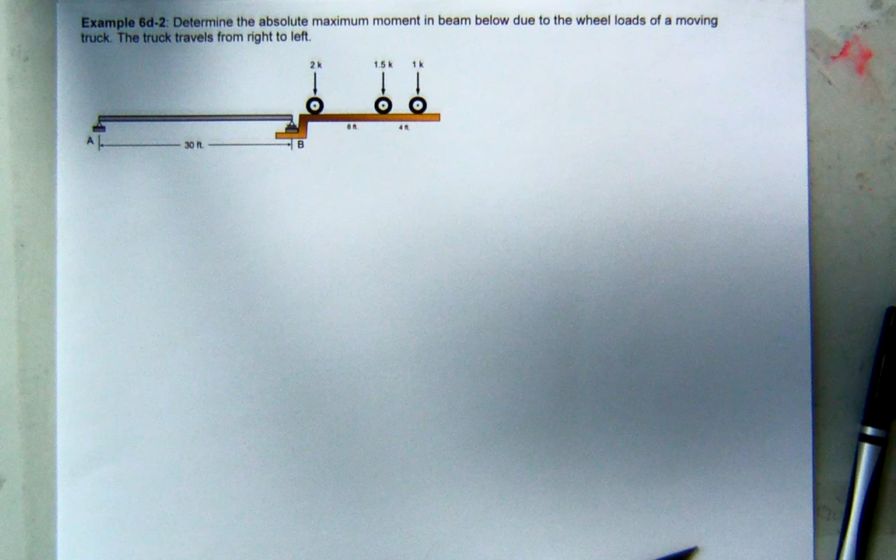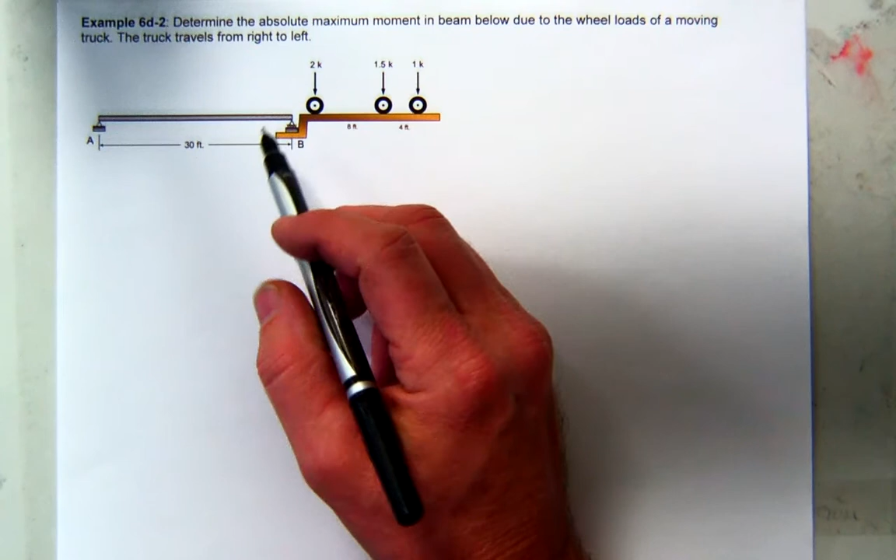All right, let's work on this guy. So we want to determine the absolute maximum moment in the beam. You might remember we talked about that last time, and that's that technique where about the center line you balance each force with the resultant force.

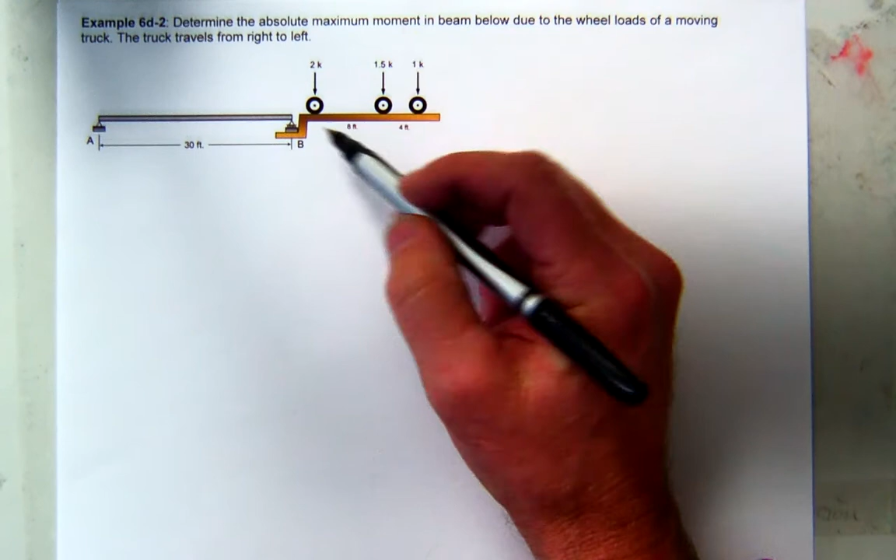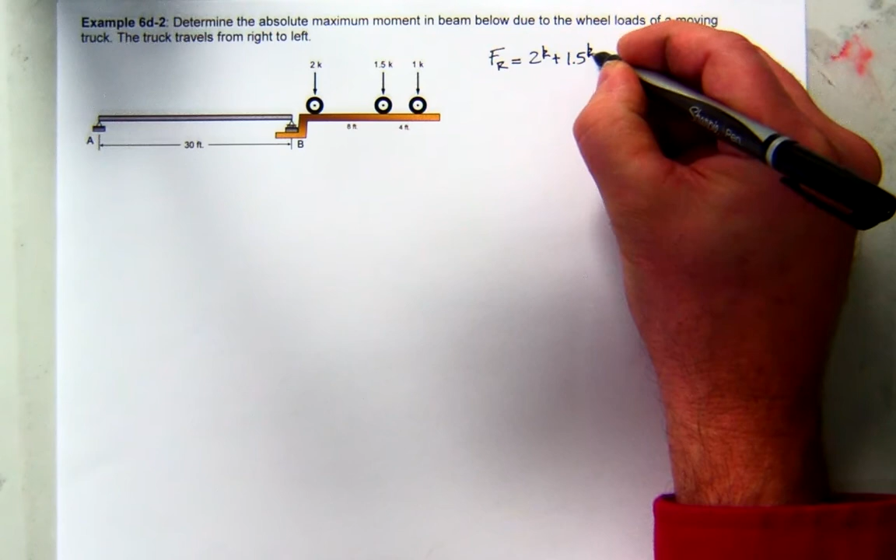And since we had three forces in our system, we need to do three cases. So the first thing we need to do is find the resultant force and its location. The resultant force is an easy calculation, you just add up the three: 2 kips plus 1.5 kips plus 1 kip. That looks like 4.5 kips.

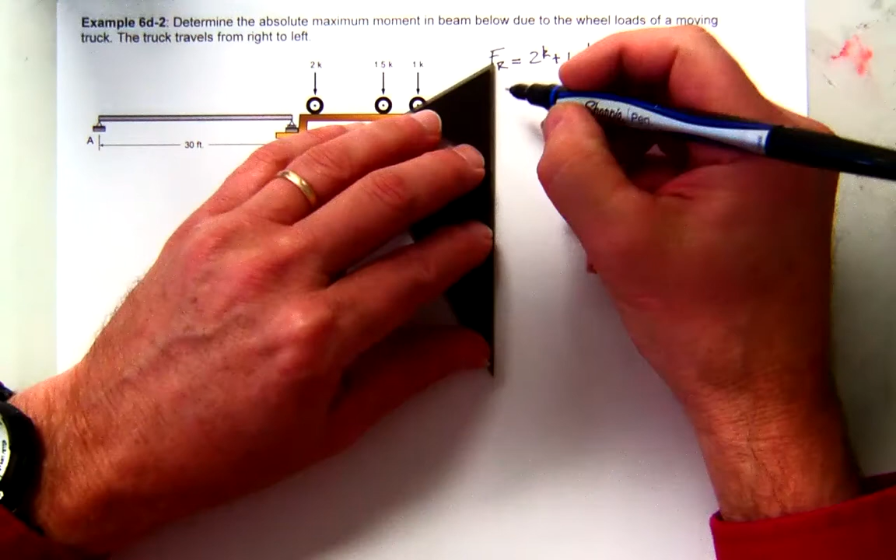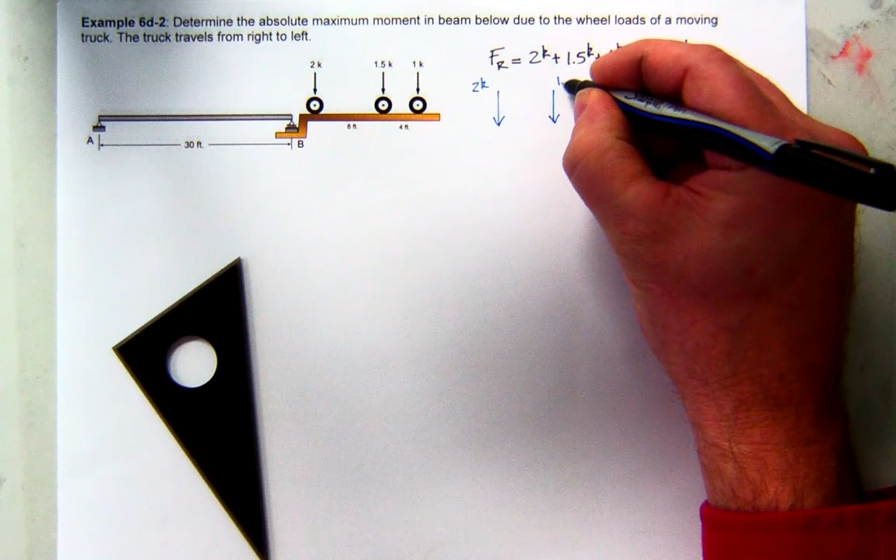Now for the resultant, what I like to do is draw a little picture. I'll just start with the one on the far left. So there's 2 kips, and then some distance back, 1.5 kips, and then 1 kip. And that is 8 feet and 4 feet. So I'm going to sum the moments of this about this back point here, P.

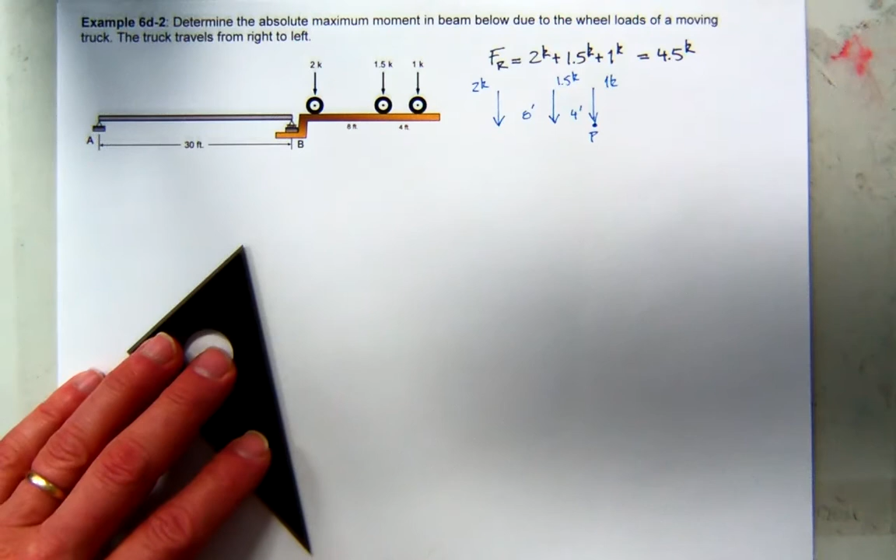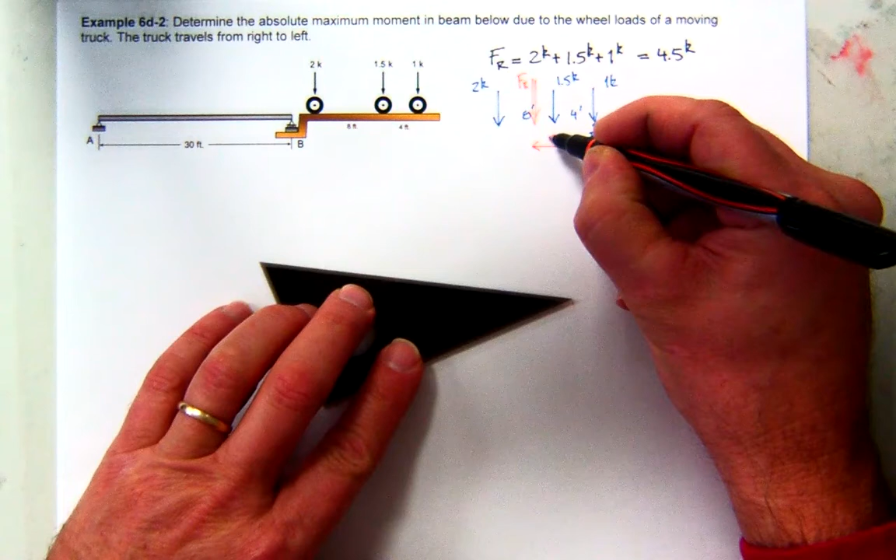And somewhere in there is my resultant force, so I would measure that from P this way. I'll call that X1. Remember, the force, we already know that the forces are the same because we know the resultant is the equivalent of the three.

So now we want to have the same moment capacity. If I sum moments about that back point P, what do I get? Well, the 1 kip will create no moment. I'll get the 1.5 kip force times 4 feet and the 2 kip force times 12 feet. And that equals 6 and 24, 30 kip feet.

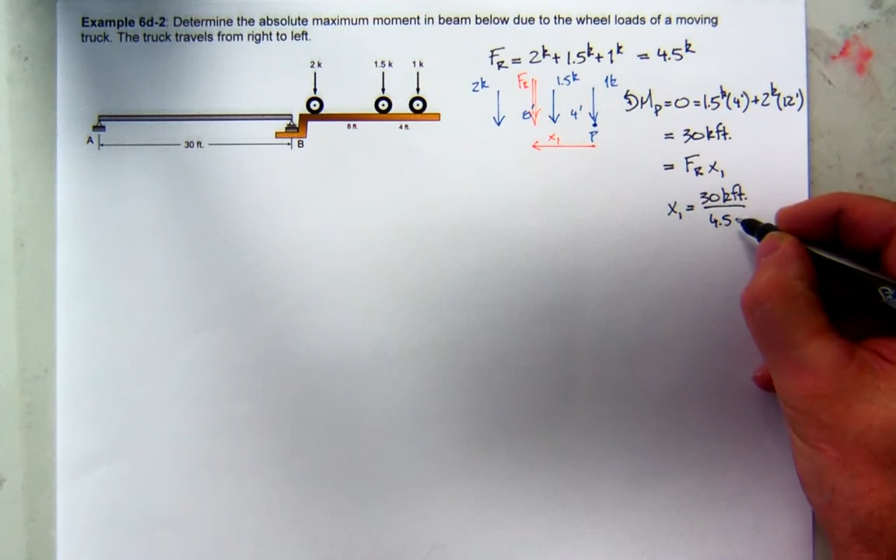And then if I do it again, this time just using the resultant force, I will get the resultant force, which I know is 4.5, times X1. So these two things have to be equal, so we can solve for X1. It should be 30 kip feet divided by 4.5 kips. I don't know what that is off the top of my head.

A little more than 6? 6.67. 6.7, is that right? Yeah. So we got that condition, so now we're going to have 3 cases to deal with.

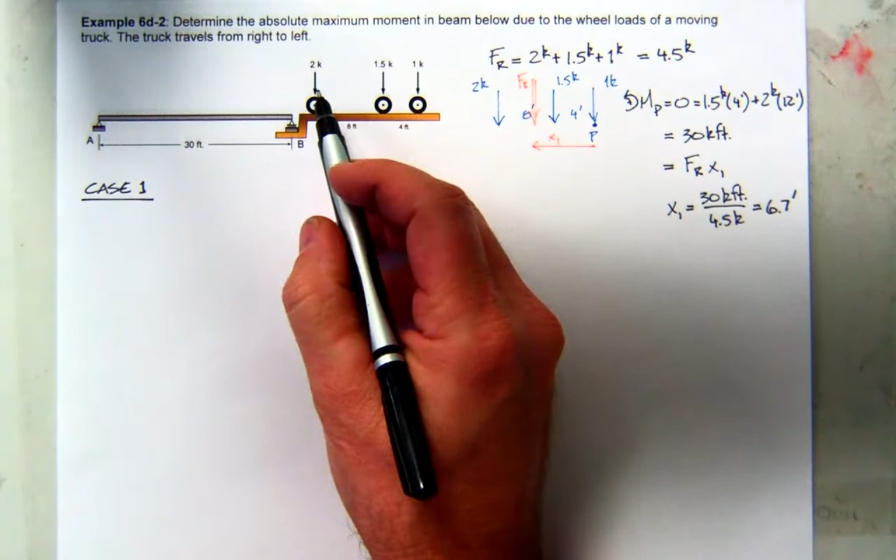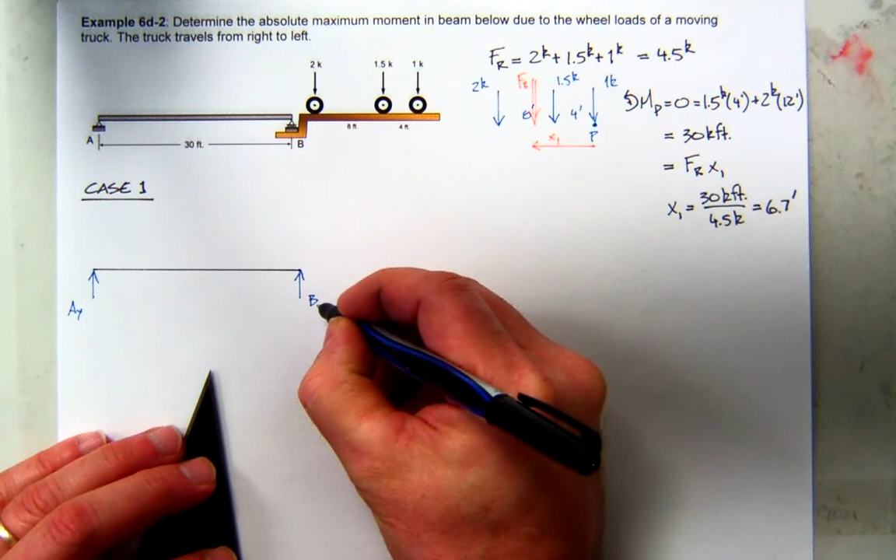So I'll just call this first one case 1. That's where we'll take the front load and balance it with the resultant force about the center line. So let me redraw the beam for reference, and let's look at AY and BY. And then I'll put in the center line, and then we need to look at a balance between these.

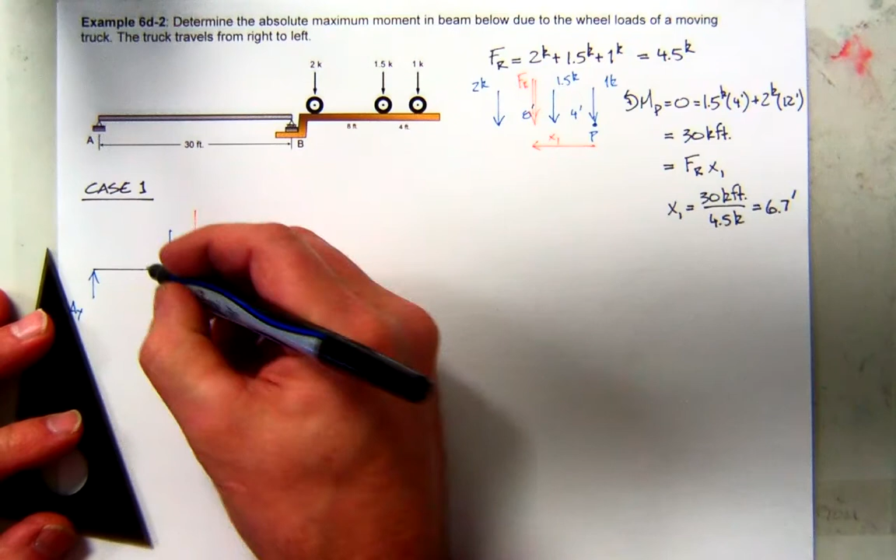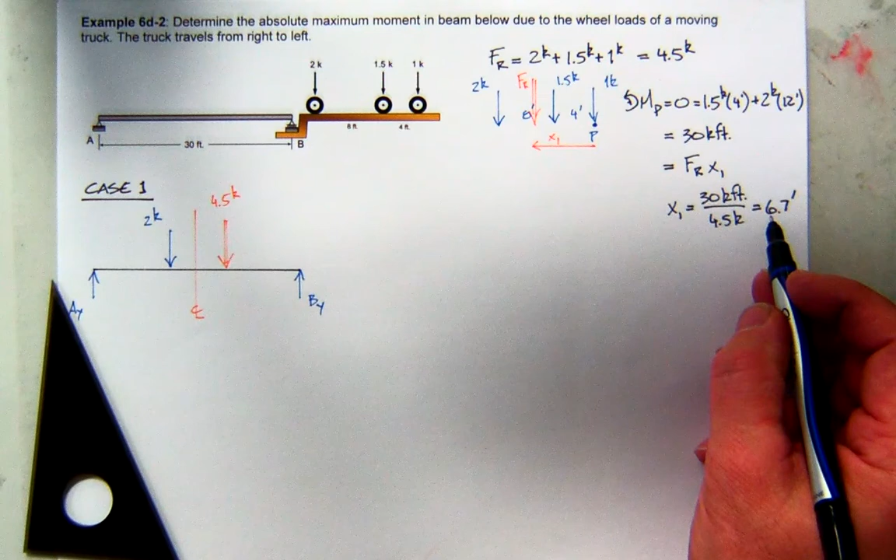So this is 6.7 feet. The total here is 12. So the distance from 2 to this thing would be 12 minus that, or 5.3. And that's the distance between these two, and that's the distance we're going to have to split. So here's my 2 kip force balanced with the resultant force, which is 4.5 kips. And the distance between those will be the 5.3 divided by 2, which is going to be what?

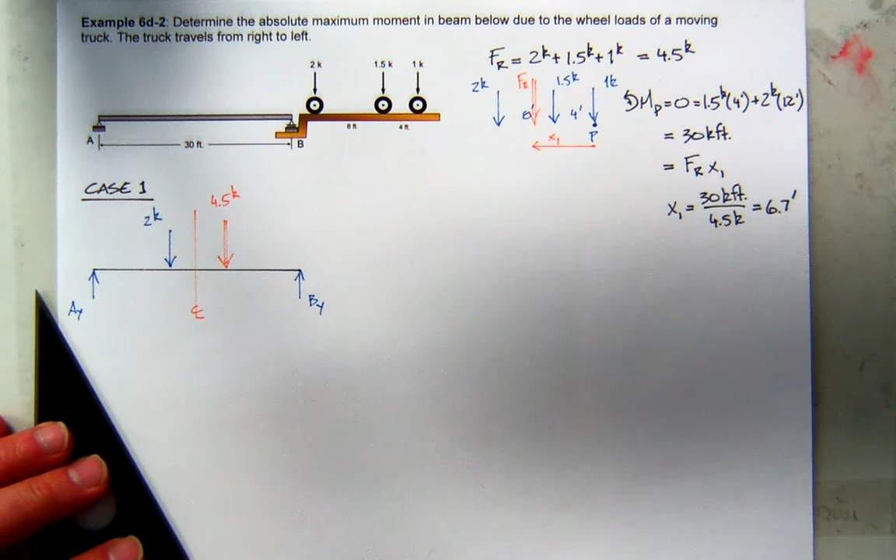Something really strange, 2.67? That's close enough, probably with the rounding it's probably 2.67. It's actually 5.33333, isn't it? What's 5.333 divided by 2? That's the 2.67. I believe you. That's 2 2/3, right? Yeah, I'm going to write it that way, 2 2/3 feet.

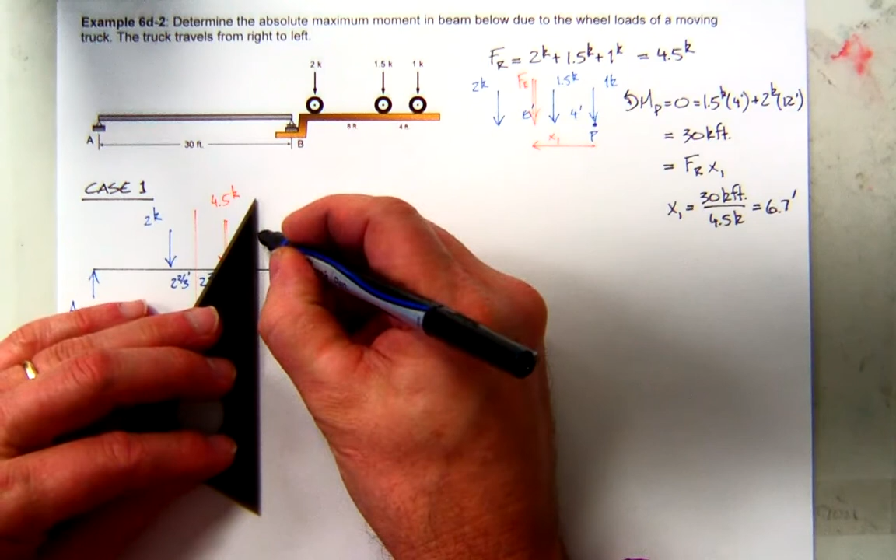And then we go back to the 1.5, and we go back to the 1. Now I know the difference between there is 4. And what's the difference here? Well, that was 8, that's 6.67 minus 4, that's 2.67, right? Another 2 2/3. I think so, so that's another 2 2/3. Strange dimensions there unfortunately, but that's the way it goes.

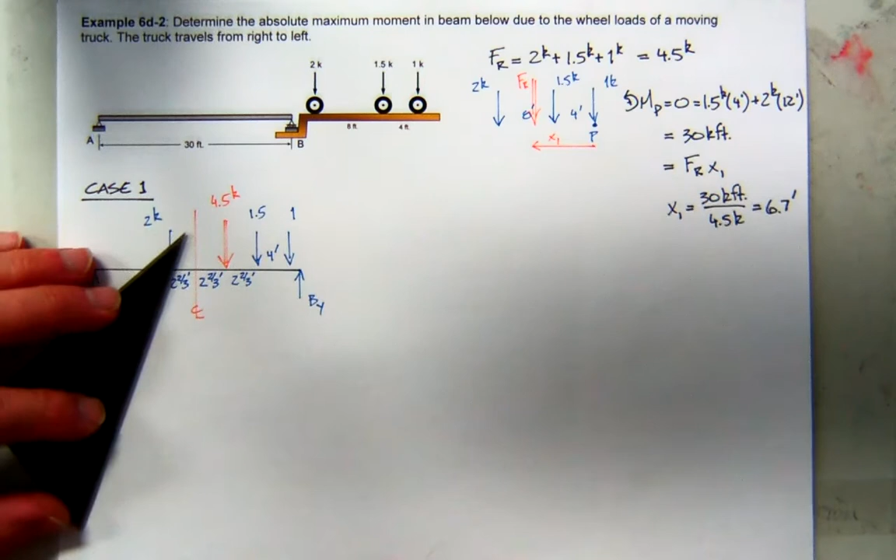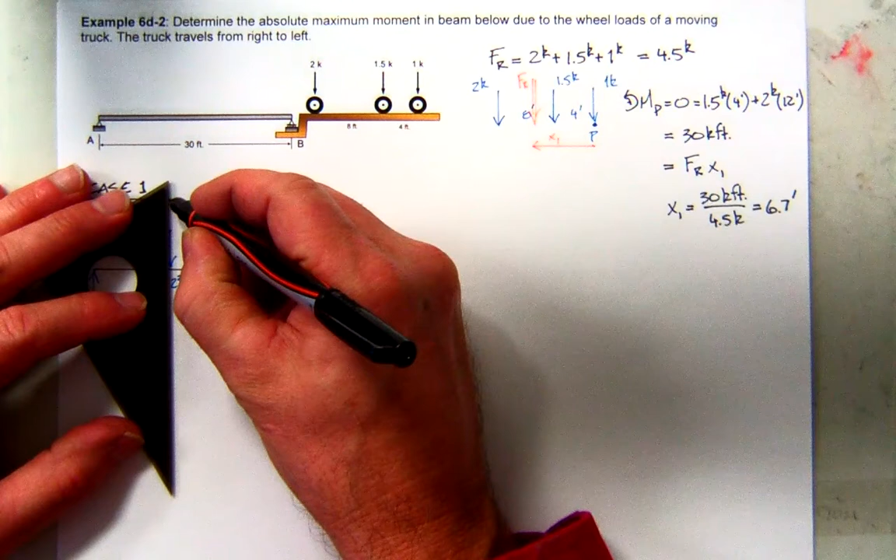Now remember, case 1, we're balancing 1, so we're really looking for the moment under here, I'll call it M1. So that means ultimately I'm going to cut the structure there, and you decide whether you want the left side or the right side. I think the left side is clearly the advantage. So we want to find the reaction at A, so let's come over and sum moments at B and make sure our structure is in equilibrium.

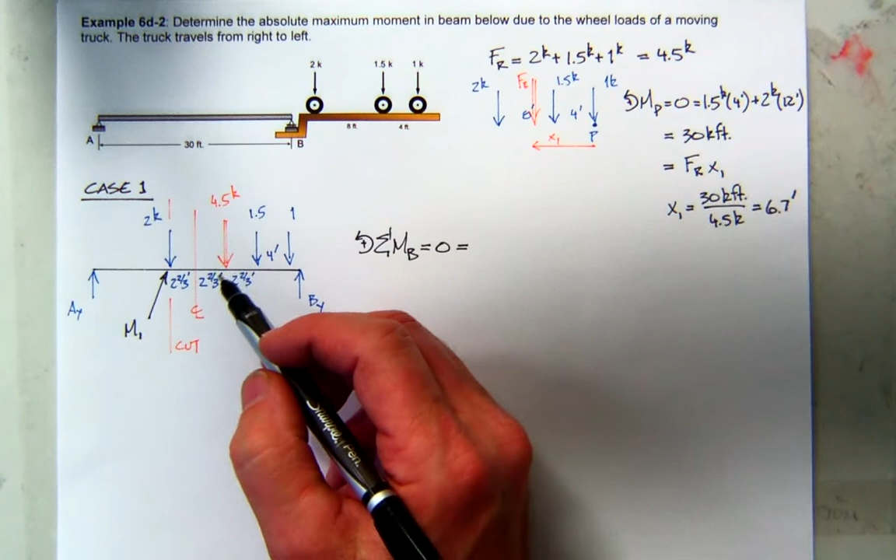Now again, you can work with all the forces or just the resultant. I think in this case the resultant's going to be a lot easier to work with than dealing with 3 forces. So the moment about B, the resultant force creates positive moment. It's 4.5 kip force. What's the distance from B to the centroid? Well, this is 15 feet, and it'll be 15 minus the 2 2/3, so that should be 12 1/3. That make sense? This is from B to here. And then AY is negative moment, and it is a moment of 30. So what's AY?

I think it'll... I don't know whatever that is. Something like 2 something? 1.85? Anybody else get that? Yes? No? Maybe? Anybody? Bueller? No? Okay, I'm going to believe it's 1.85. Wow, you guys are really in another world today. 1.85?

And that will be in kips. So now I can cut my structure, and we know the reaction is 1.85 kips. I'm looking for the moment there, which I'm calling moment 1, the positive moment. And what's that distance going to be? Well, this section is also 15 minus 2 2/3, so that'll also be 12 1/3 feet.

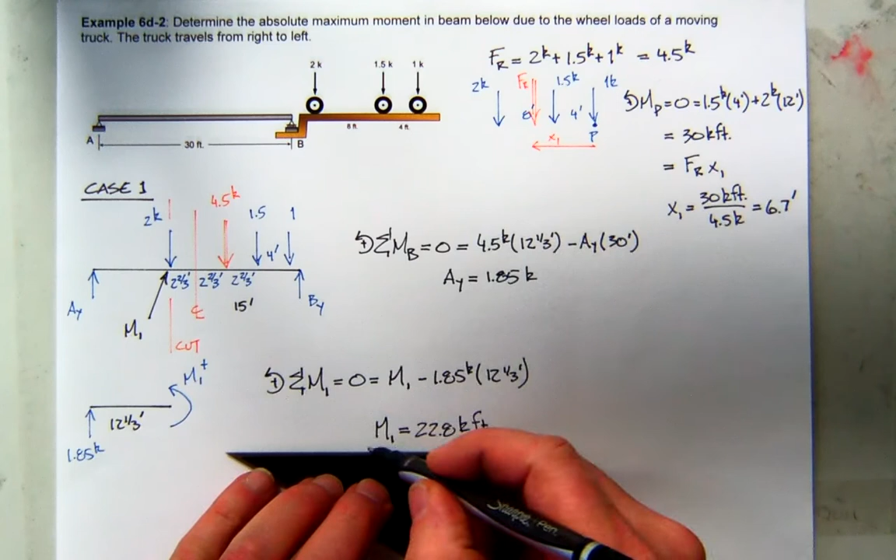Quick question. So when you make your cut and you're taking the moment, do you take it about the first force? You take it under the force that you're balancing the resultant with.

Okay, so the next case that we're going to do, we're going to balance the resultant and the second force. So you'll take it at that second force, which would be just to the right, and we'll take a moment into that. Then the third case will be these two.

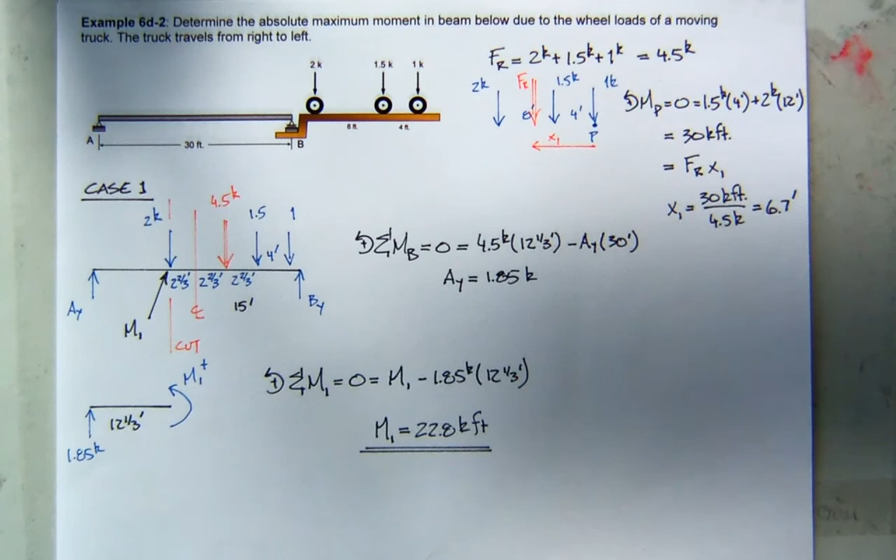All right, so I've got to make some room because I don't have enough on my page here to continue. Give me just a second. So we'll flip that one over, and we'll start again with case 2.

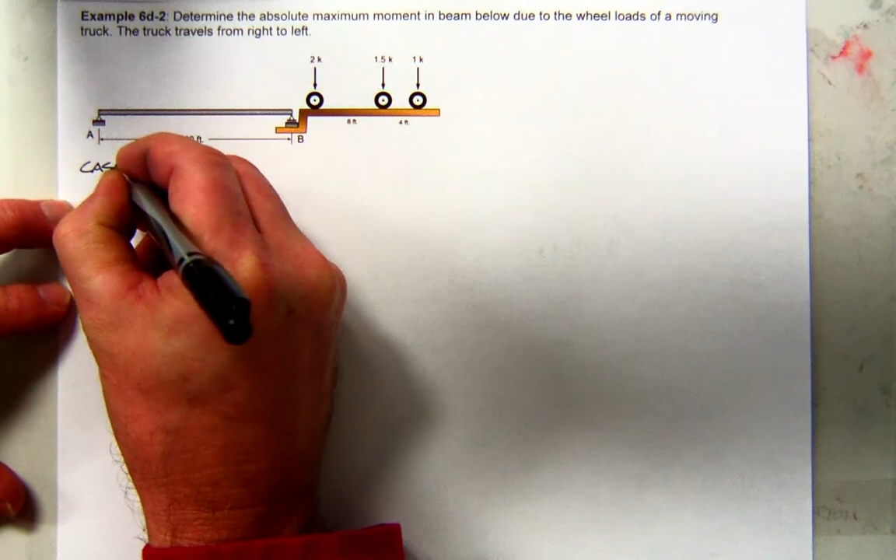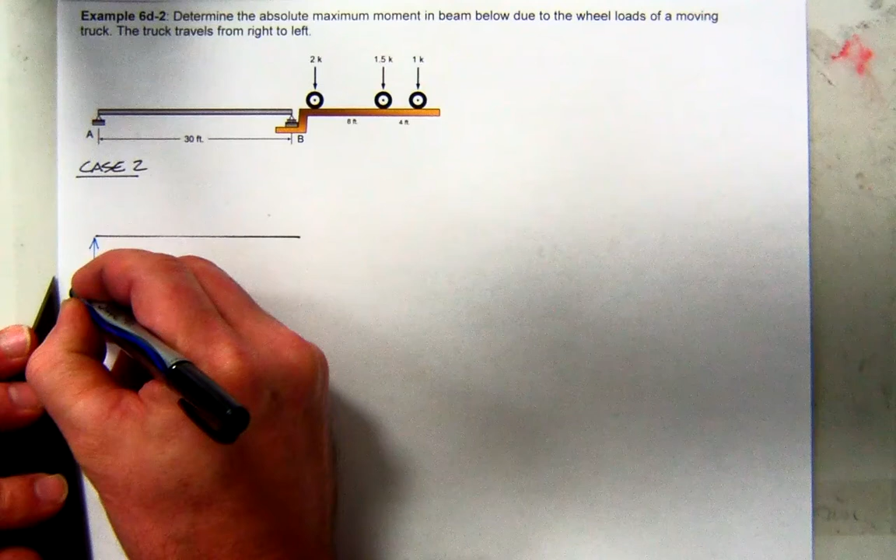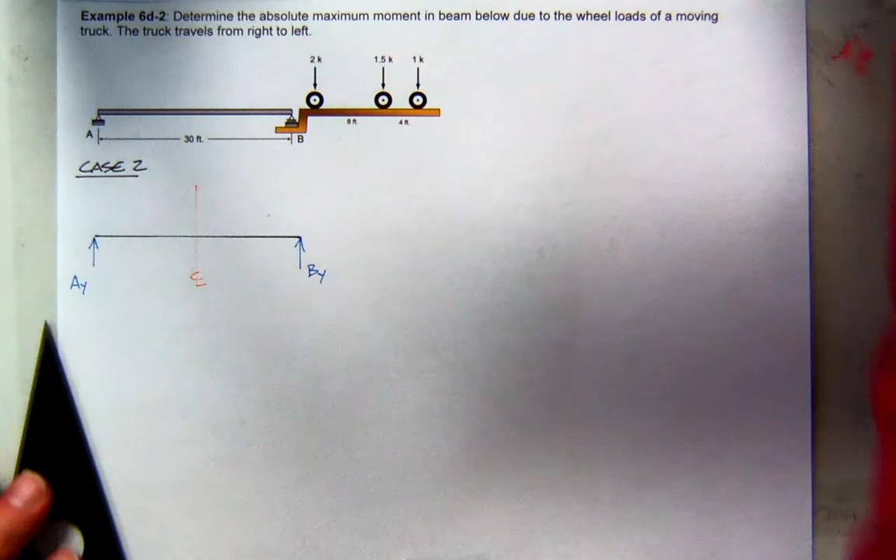So again, we'll start with the same beam. We'll have a reaction at A, a reaction at B, and then about the center line, we're going to balance our load system. Remember, we're looking at this as our system, so we want to balance the resultant force and the second force about the center line.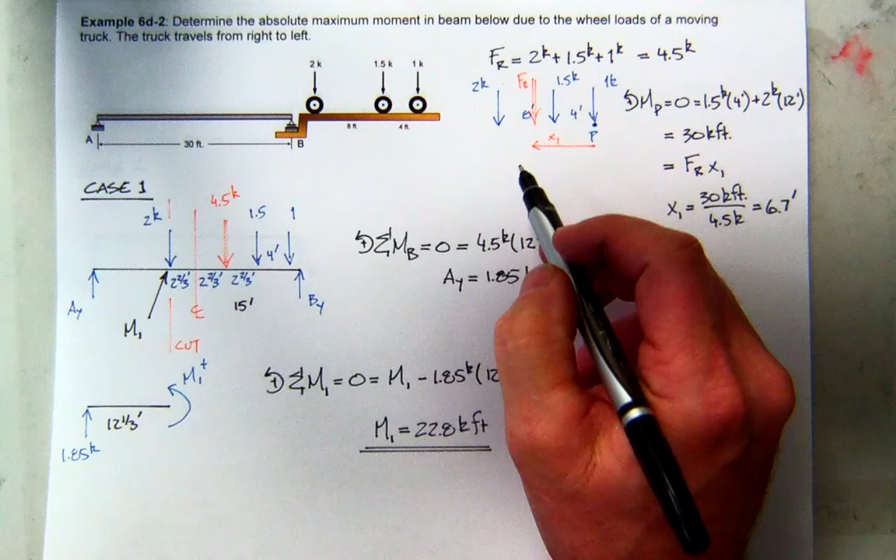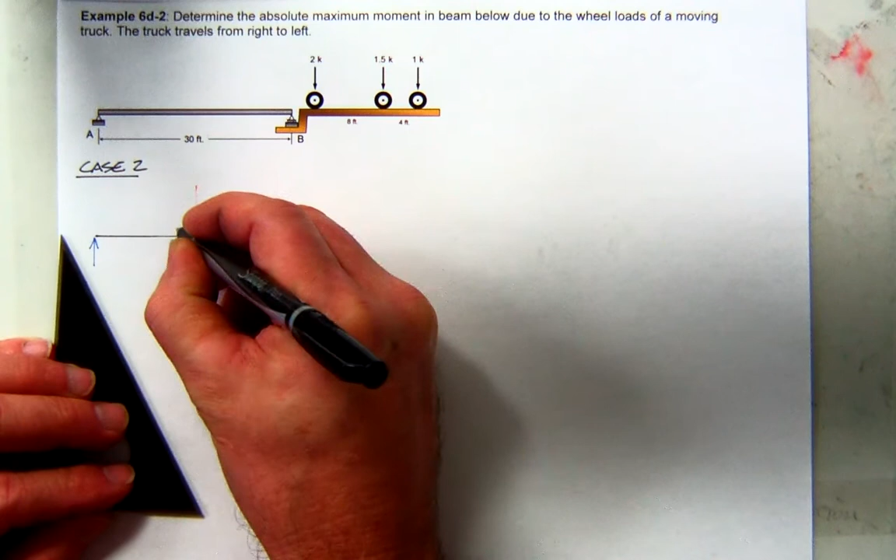And what's the distance here? That's 2 and 2/3. You divide that, you get 1 1/3, right? So from the center line, 1 1/3 to the left is the resultant force, 1 1/3 to the right is the second. I can't draw that to scale, so I'll just put 1 1/3, 1 1/3 feet, and on the left side...

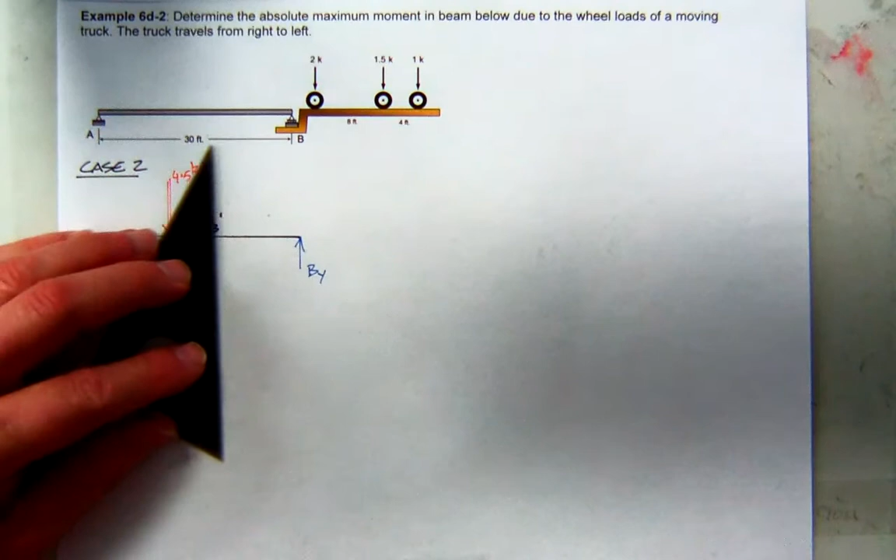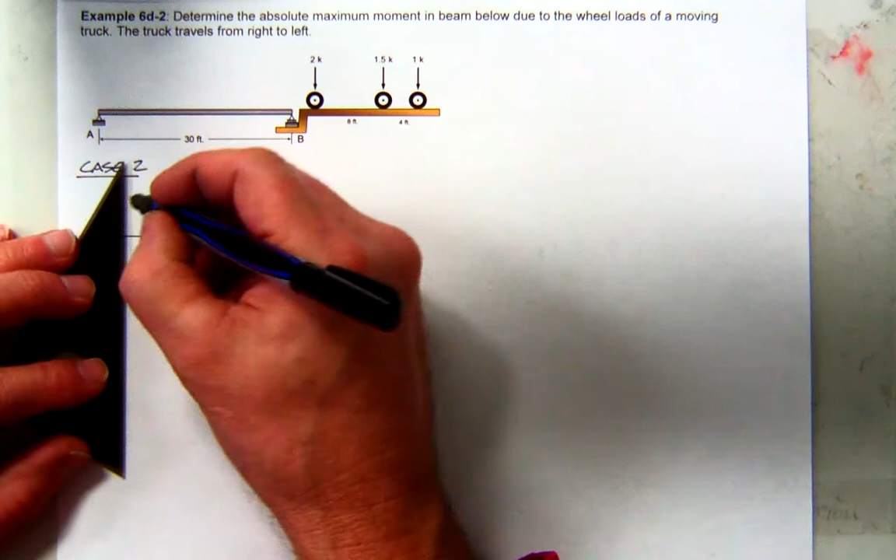That's my resultant force, 4.5 kips. On the right side is the second force, which is 1.5 kips. And then 4 feet back is the 1 kip force, and so many feet forward is the 2 kip force.

And that distance there, we also had solved this distance here, and I believe that was... what was that before? That was 5 1/3, wasn't it? Because this was 8 feet. This was 12 total, and we went 6 2/3, so this is 5 1/3. That make sense?

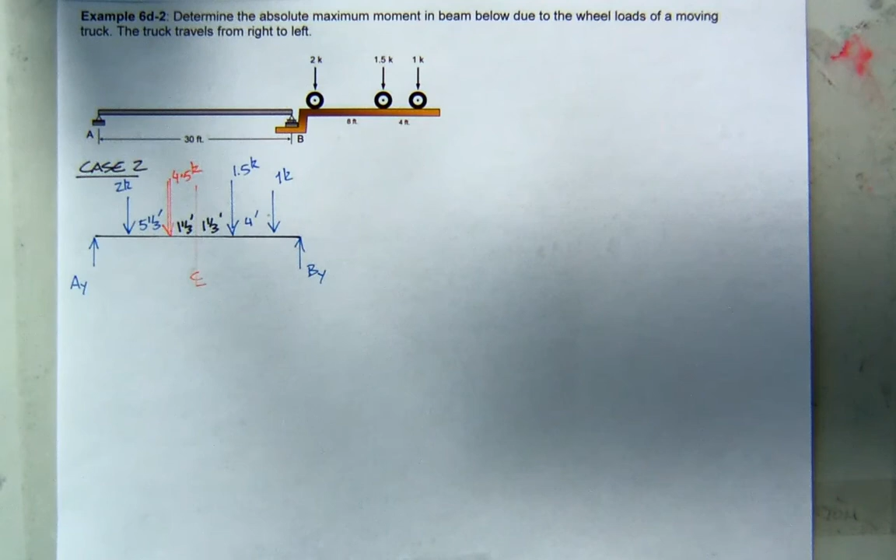And we're looking for the moment here. Call that M2. So that's probably where we'll cut the structure.

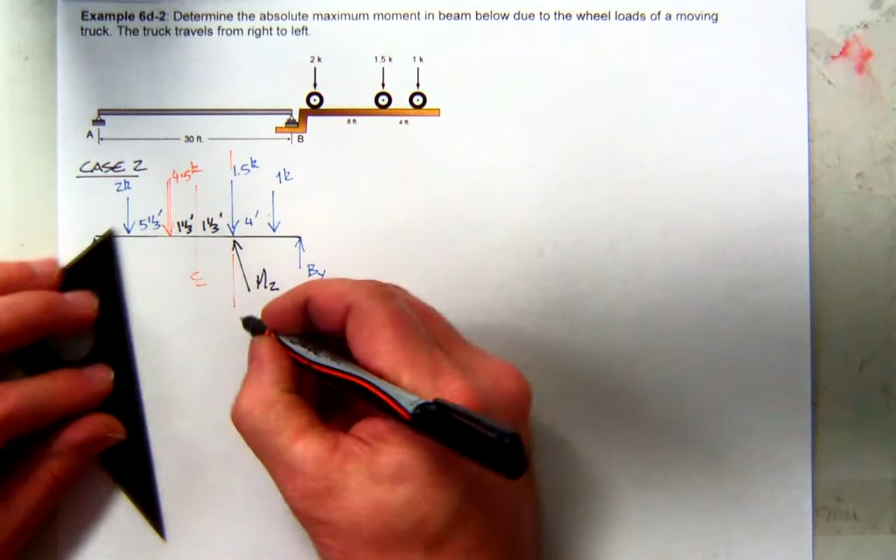You have to decide left or right. Yeah, right's going to be... This is the first time in the problems that we work here in class that because we have 3 forces, when you cut this middle force, no matter what side you look at, you're going to have to deal with a force in addition to just the reaction. So we will go right, so we'll need the reaction at B.

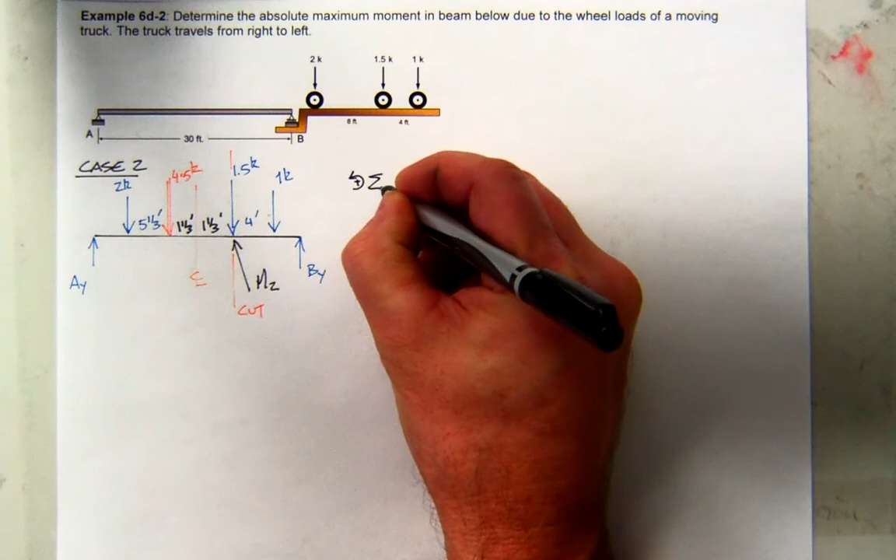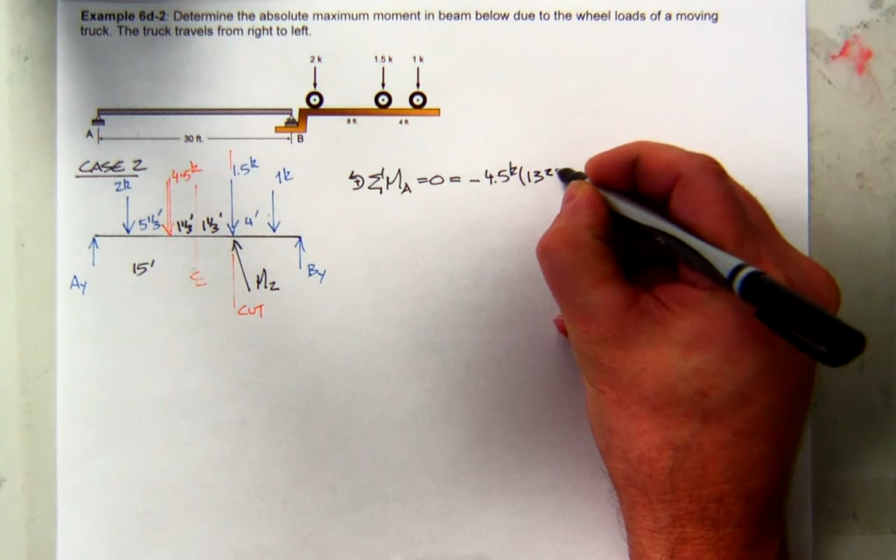So let's sum moments about A, and that will give us the reaction at B. Just like before, we're only going to use the resultant. So about A, our resultant force creates negative moment. The force is 4.5 kips. And what's the distance from A to here? Remember, the total distance is 15, so 15 minus 1 1/3 should be 13 2/3. And then over here at B, B creates positive moment, and the distance from A to B is 30. So what's BY? 2.05? 2.05, and then it'll be kips.

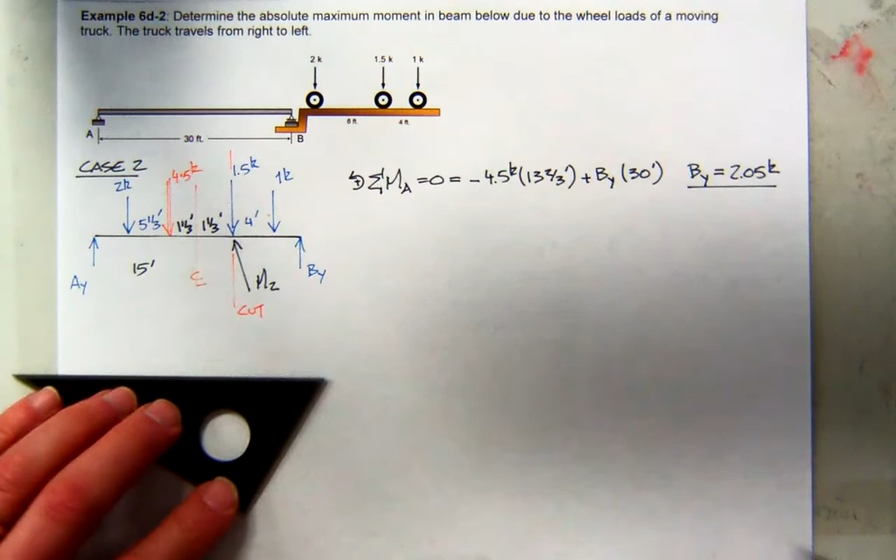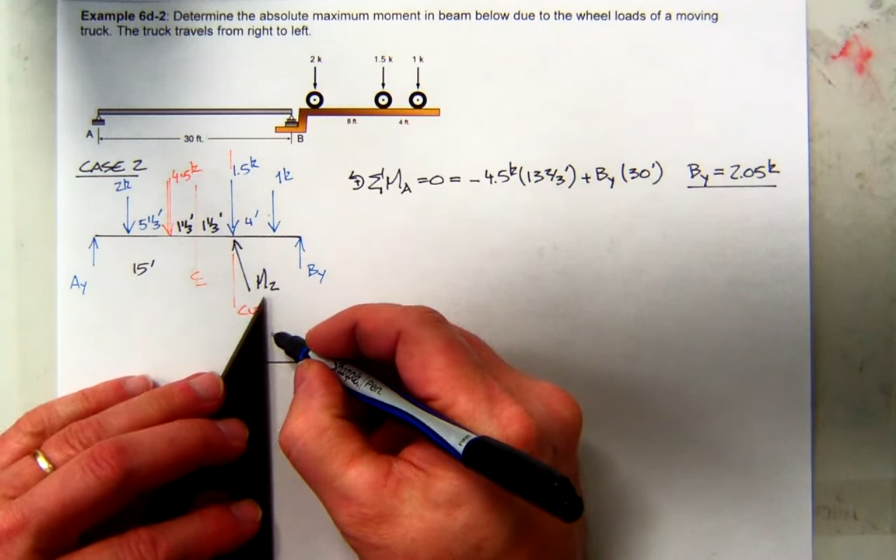So now when we make our cut, we're going to know that BY is 2.05 kips. We're going to know this 1 kip force is 4 feet back. We've got our moment at 2. And what's that total distance of this piece? Well, it's going to be 15 minus 1 1/3. It's also going to be 13 2/3 feet long, and it's not to scale.

So now when we sum moments about the cut, and we'll use right-hand rule for our sign convention, what do we have? Well, the internal moment's negative. The moment of the 1 kip force is also negative. That'd be 1 kip times that moment arm of 4 feet. Our reaction creates positive moment. That's 2.05, the value we just solved. And it'll be times the length of the segment, which is 13 2/3 feet. And I'm calling that moment 2.

So what is moment 2? This is like 28 minus 4. It's going to be like 23 something, maybe 24 something. Just guessing. Pretty much 24 on the dot. 24 on the dot.

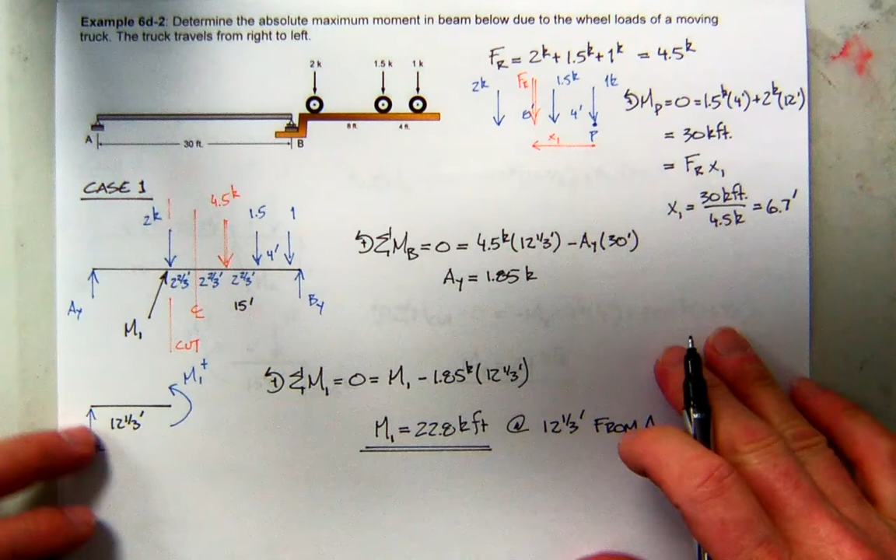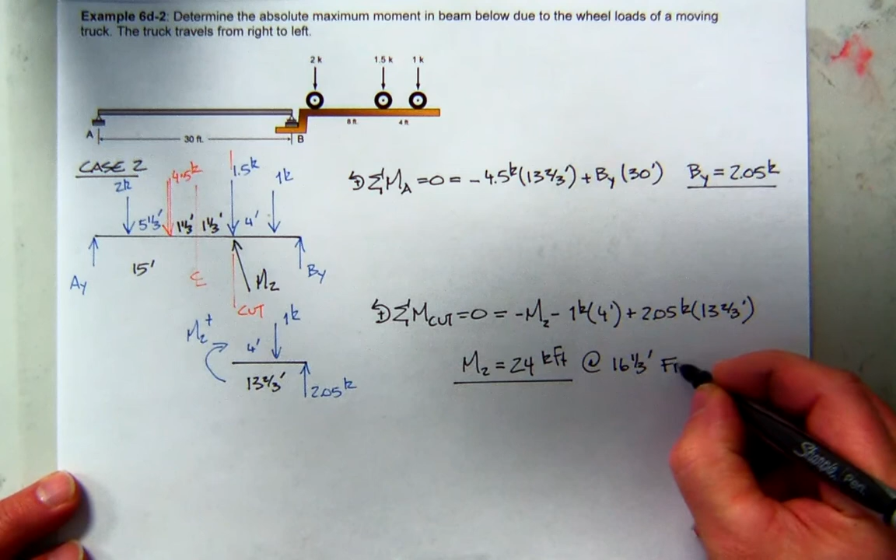One thing I forgot to do is go back and find the moment. It's at this point, which would be 12 1/3 feet from A. Now this one is at 15 plus 1 1/3, which is 16 1/3 feet from A. Comparing the two right now, it looks like the one at 2 is controlling.

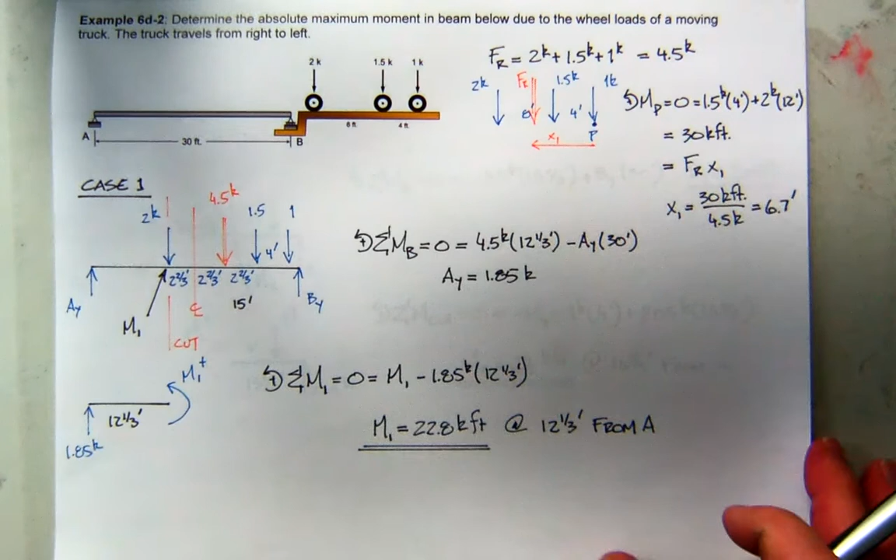We do have one more case to check. That would be when we balance the resultant force and the 1. And I've run out of paper. Nope, I found another page. Here it is. Okay, so here we go.

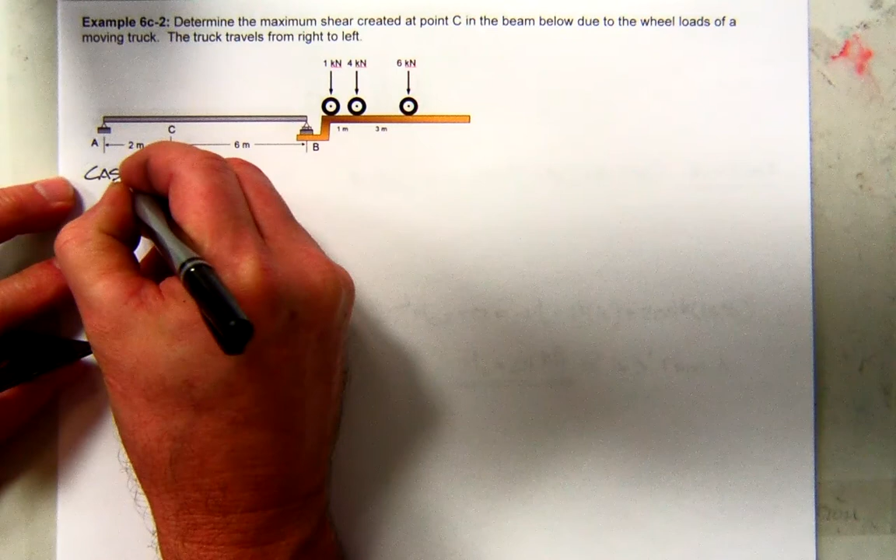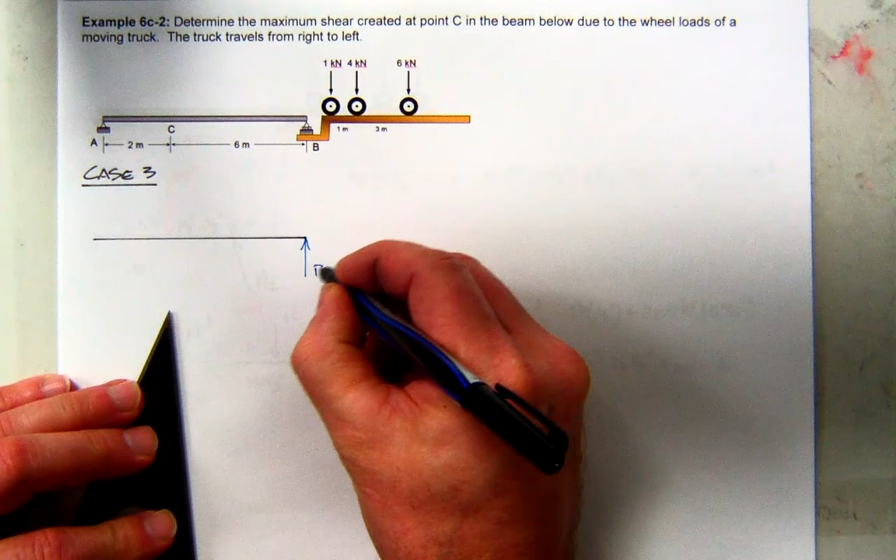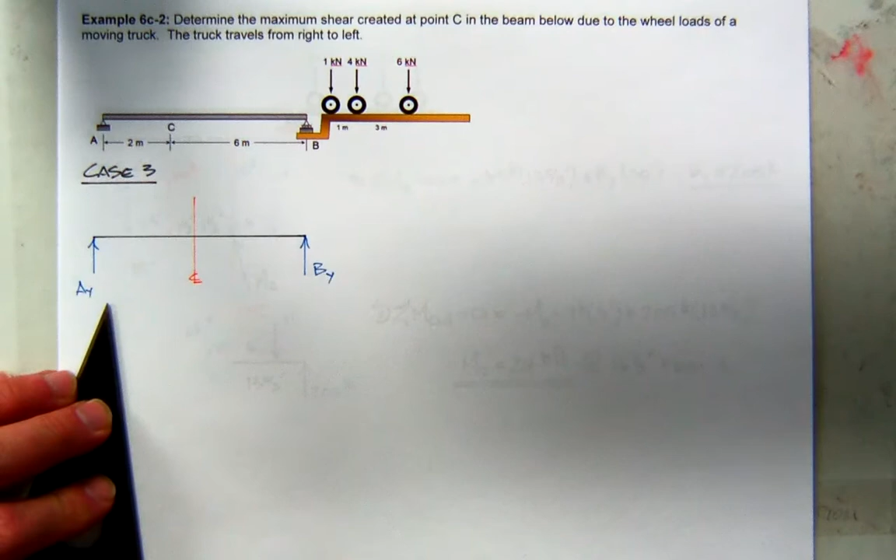So case 3. Again, I'll draw my structure. We'll assume a reaction at BY, one at AY. We'll go back and find the center line of our beam. Now you might remember we want to balance our resultant force and 1.

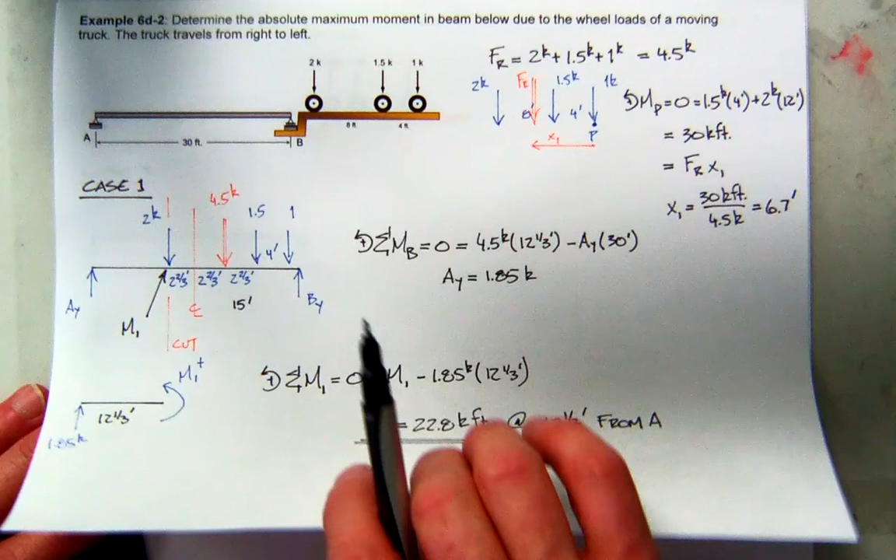So that's 4 feet. Well, actually, the distance between here is x1, which is 6 2/3. If you cut that in half, you get 3 1/3. So let's see, I'm going to have 3 1/3 feet over, and I'll hit...

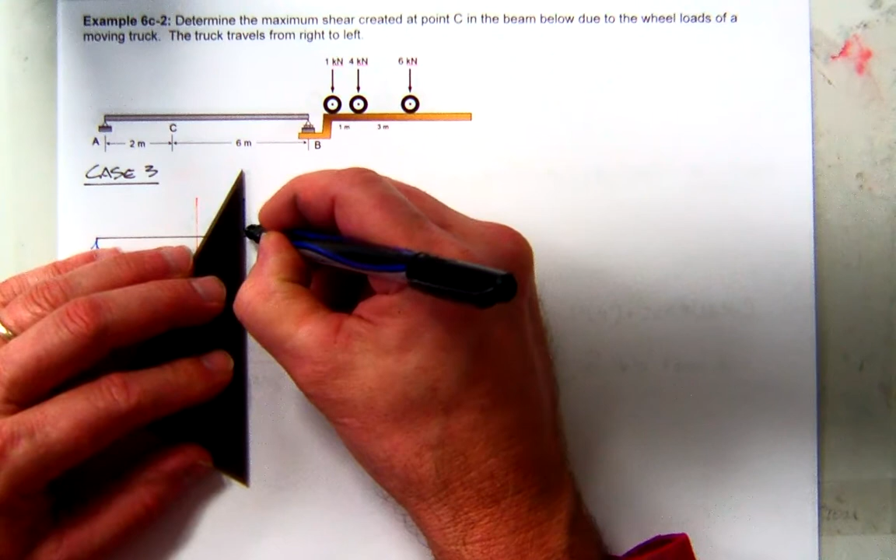Oh, that's a different problem, isn't it? I'm going to use the page anyway, just ignore that. That's a 1 kip. And of course, 3 1/3 feet forward would be the resultant. So I want to put that in there first, just to show you the balancing part.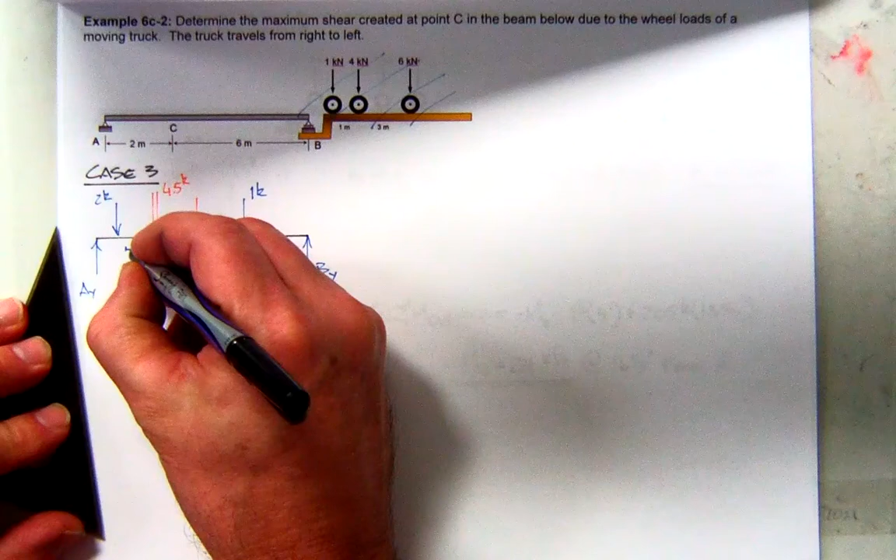And then where was that in between force? The 1 1/2. It was 4 feet from 1, so it's going to be just here, and that was 1 1/2. Of course, it's 4 feet here, and this is 3 1/3, so that little distance is just going to be 2/3 of a foot. Kind of crazy geometry, a little confusing, but you can see all the different pieces.

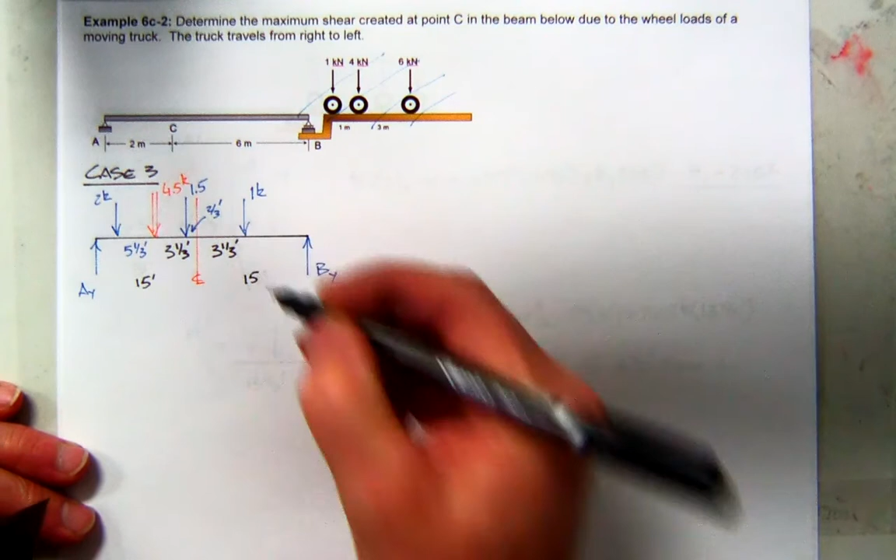Don't forget, we're cutting this in the center, so each of these segments is 15. And I'm going to be looking under this force, I'll call that M3. So we're going to cut the structure there.

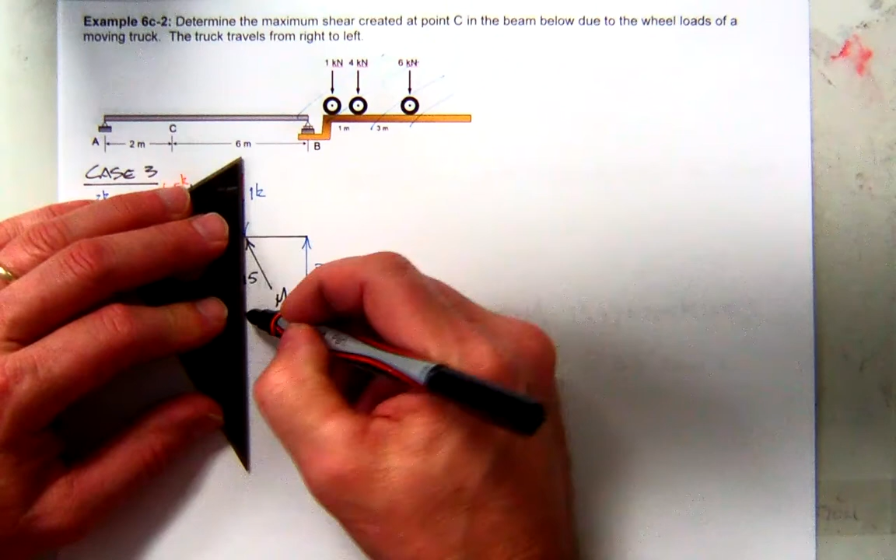Do you want to work left or right? Right, so we want BY. If we sum moments about A, make sure it's in equilibrium, we should be able to get By. Again, using just the resultant force about A, my resultant force will create a negative moment.

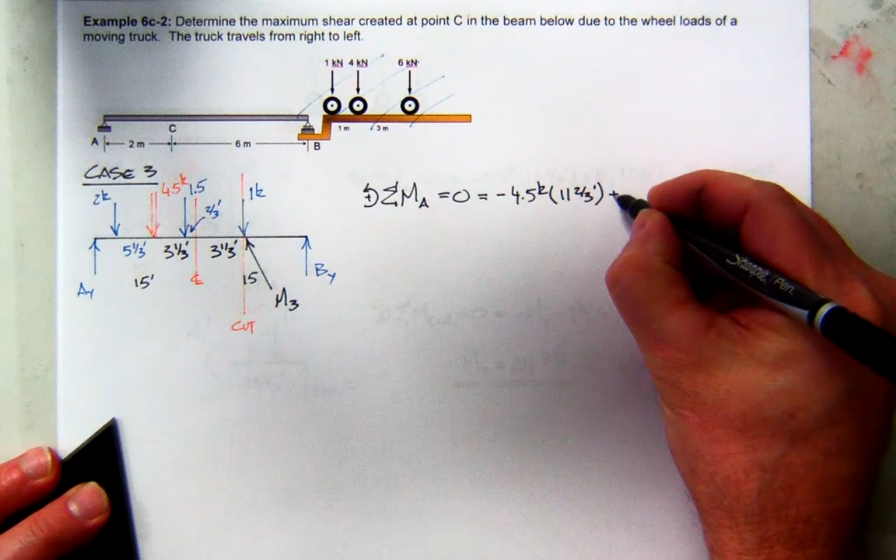That'll be 4.5 kips is the force. The distance from A to here, well, this is 15 minus 3 1/3 is 11 2/3. And then, of course, my reaction at By creates positive moment, and that's the complete length of the beam, 30 feet. So what's By?

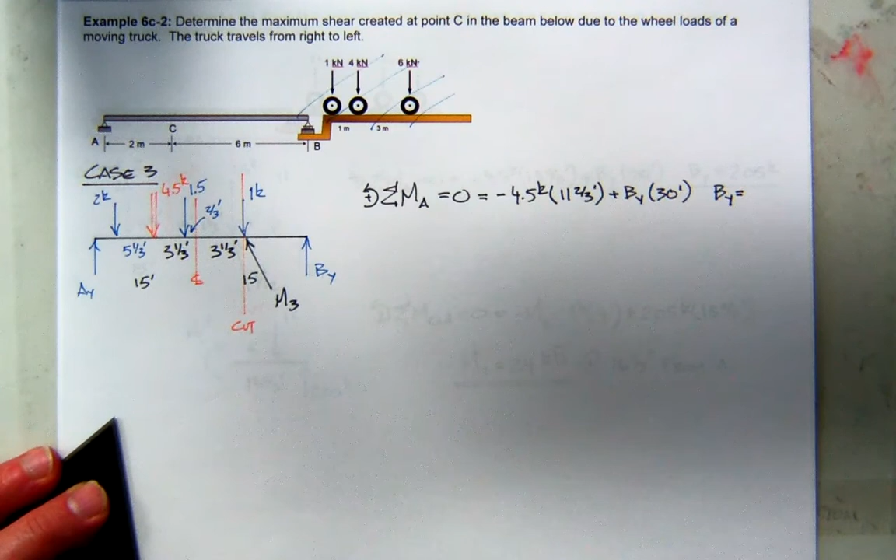1.75. Oh, I was going to guess that. No, I wasn't. 1.75. All right, so then I can come down here and now look at my structure to the right. I found By, it's 1.75 kips.

I'm looking for the moment there. I've called that point 3. And I know the distance of that little segment, it's this, so I know this is 15, and again minus 3 1/3 should be 11 2/3.

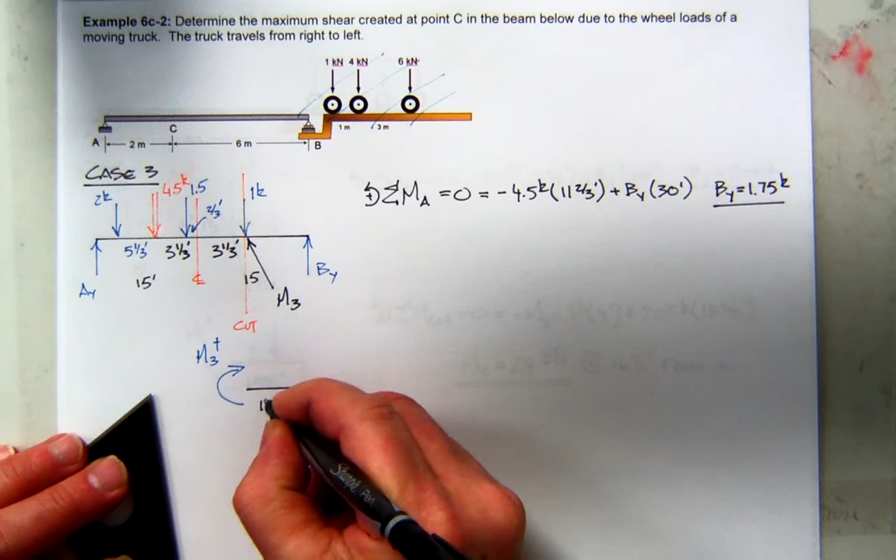And if you sum moments about the cut, make sure it's in equilibrium, what do you have? Well, the moment here is negative. About the cut, the 1.75 creates positive moment, 1.75 kips, and what's the distance? We just figured out 11 2/3. So it looks like the moment at 3 is, I don't know, 20.4.

And that would be kip feet. And that would be at this distance, which would be 15 plus 3 1/3, which is 18 1/3 feet from A. So now we've got our 3 cases.

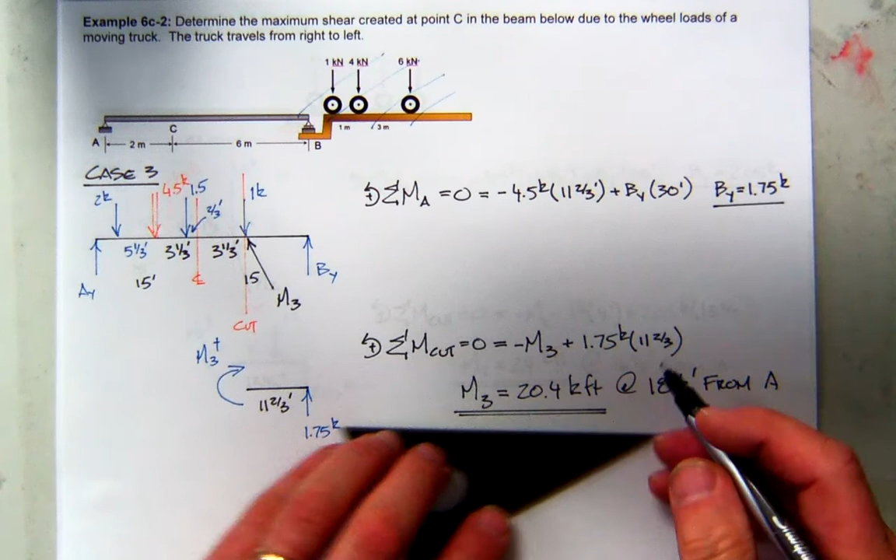The final solution is just to review it. So we got 20, 22.8, and that was first case 1. Where did case 2 go? I put it underneath that one. So it looks like the final answer, the max, is equal to 24 kip feet, and that's case 2, which was 16 1/3 feet from A.

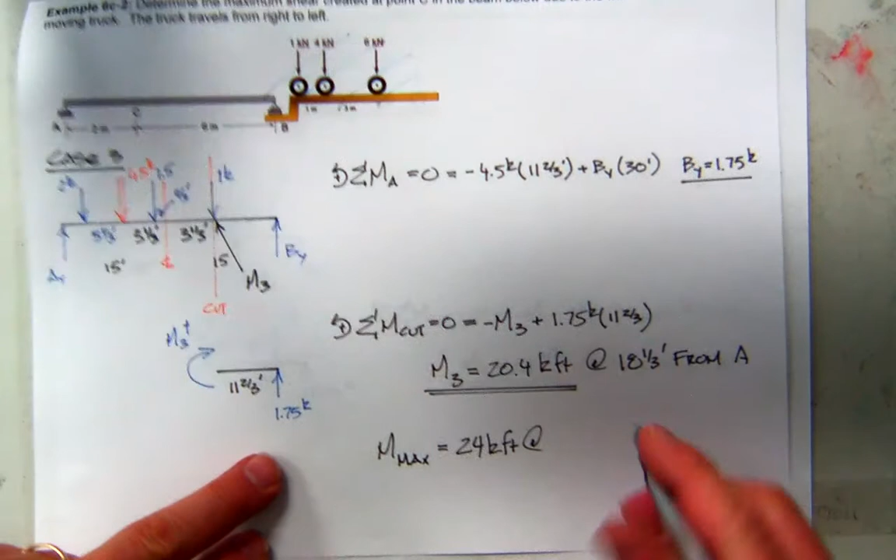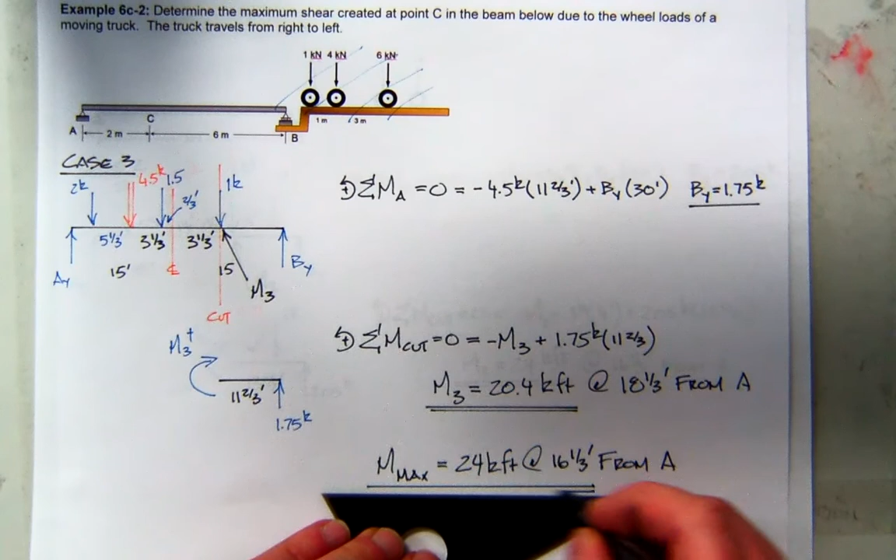Okay, so a little review. This is not doable in a 15-minute window on the exam. It just took us 22 minutes to do it. So a 3-case scenario would be unlikely. A 2-case scenario, though, likely. So keep that in mind.

So any other questions about this before we move on?

All right, that's the last problem of the semester.

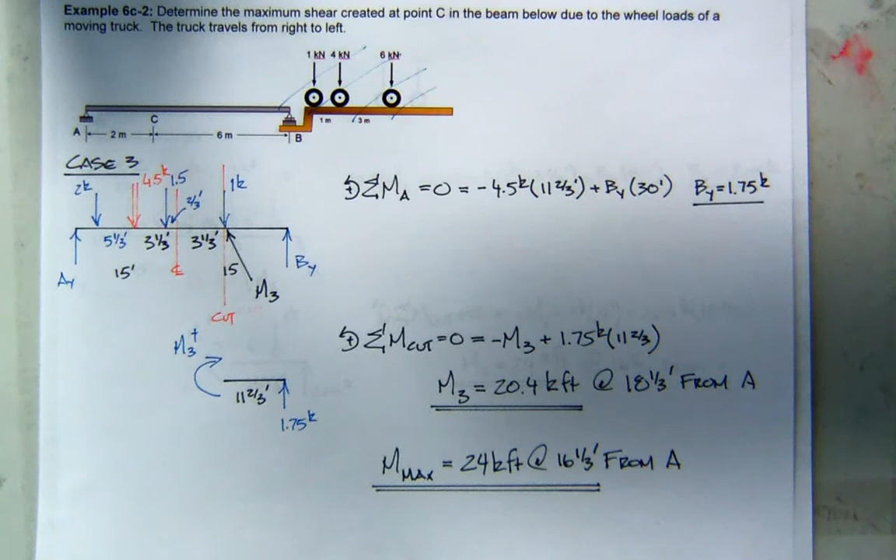All right, that's enthusiastic. Yes. I was trying to give my partner a high five, but he's not as enthusiastic. Well, speaking of high fives, let me turn this off. I don't think this needs to be recorded.